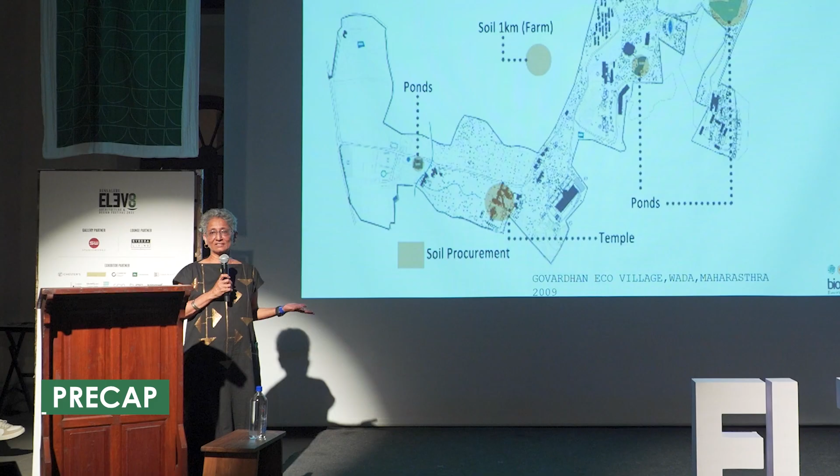When we started in 2009, we had no idea of the meteorological data of the site. So we worked for 8 months before we started, and we realized it's a composite climate. But besides that, again, it started, where am I going to get earth from for building? The interesting part was we didn't have, and you're all students, case studies to go back to. So if I go to Trivandrum and study that, I cannot use it here. And I didn't even have the money to travel so much. So I was only reading some books, looking at some pictures here and there, no internet at that time.

Let's say by serendipity, you ended up having gardens. Unlike now, when the cost of land is so high and cost of construction is sometimes 1/4, 1/5, that you build a lot more. We now are obsessed with cost. How do we work with cost? How do we reduce cost? Because for us, ecological construction has to be economical. In simple terms, if we make very expensive buildings for people who have taken loans, they have to pay it longer through EMI, and working is the worst, is a disaster for environment. So if people work less, they make nice art, or they have nice conversation, it's so much better than working. So it has become part of our ethos.

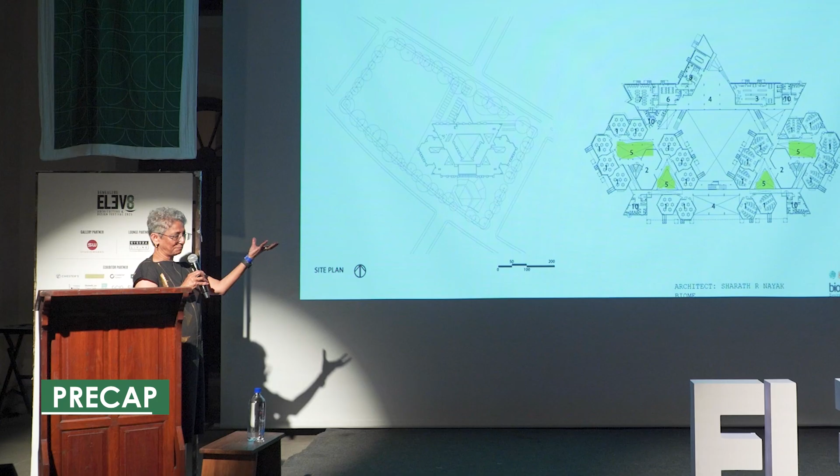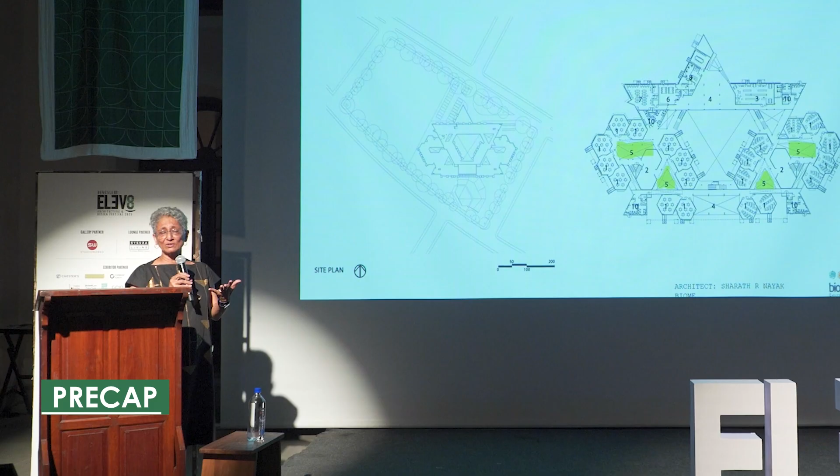So this is a school for Jindal Steel. It's about 1.5 lakh square feet. Every classroom has 3 sections. This was next to the plant, and the air was polluted because of the plant. So the school had to be naturally ventilated. So how do we do that? We can't open the windows because of the pollution. A combination of a lot of corruption in terms of making of blocks, a combination of bad design details, everything.

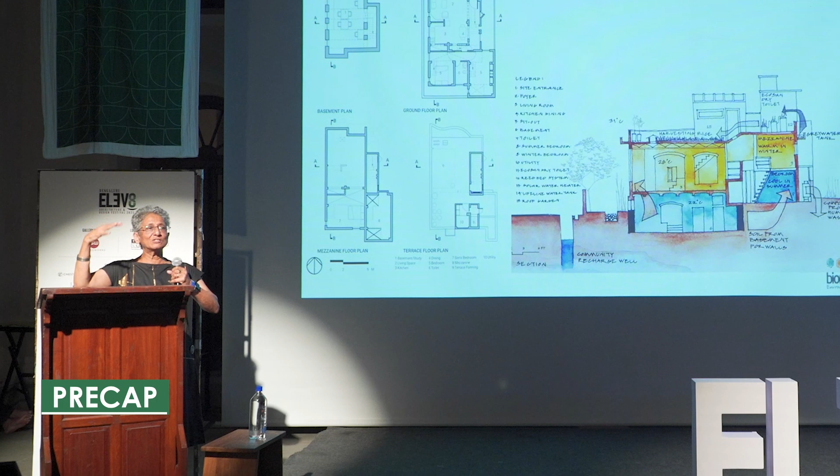The buildings were eroding away, and nobody was accepting use of earth. That failure pushed back using of earth in Bangalore by about 15 years.

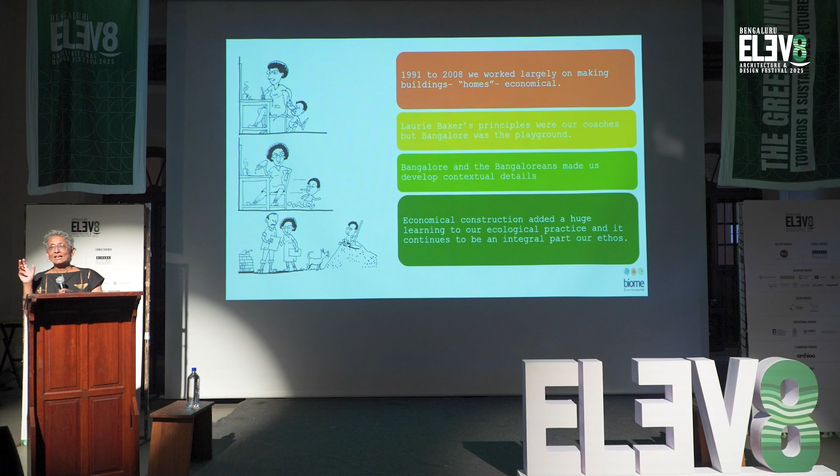So like I earlier said, the construction was double the cost of sites. So people had to reduce construction, and it had a beautiful result for it. What happened is that people built less. So by design, or let's say by serendipity, you ended up having gardens. Unlike now, when the cost of land is so high and cost of construction is sometimes 1/4, 1/5, that you build a lot more. You're taking the juice out of the site. But that wasn't happening then.

So Laurie Baker was known here. In Kerala, he'd been doing a lot of work, and in the South, he was known. It was acceptable to follow whatever his philosophies were with the clients, and a lot of the early clients were also from Kerala.

The interesting part was we didn't have, and you're all students, case studies to go back to. So if I go to Trivandrum and study that, I cannot use it here. And I didn't even have the money to travel so much. So I was only reading some books, looking at some pictures here and there, no internet at that time.

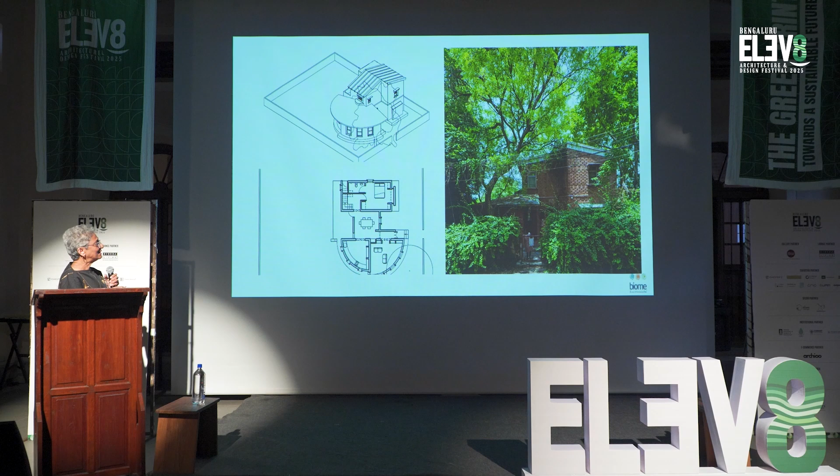With lots of skylights, saving cost in plaster and paint, that's the ethos, and using waste which is local. Instead of bringing Mangalore tiles from elsewhere, because we were not getting waste Mangalore tiles like Baker was getting in Kerala, we used stone which was available locally, just placed it.

What we are doing is not plastering, and also making the concrete better, because now we won't have exposed steel. So they also work as cover blocks.

In 1995, we bought our own plot of land in a place called Vidyaranyapura, and we decided to build our own home. Till then, talking about building with earth was difficult because Karnataka Housing Board had designed and built a large housing colony made with mud, sometime in the 80s, 86, 87. But a combination of a lot of corruption in the making of blocks, a combination of bad design details, everything, meant the buildings were eroding away and nobody was accepting use of earth. That failure pushed back the use of earth in Bangalore by about 15 years.

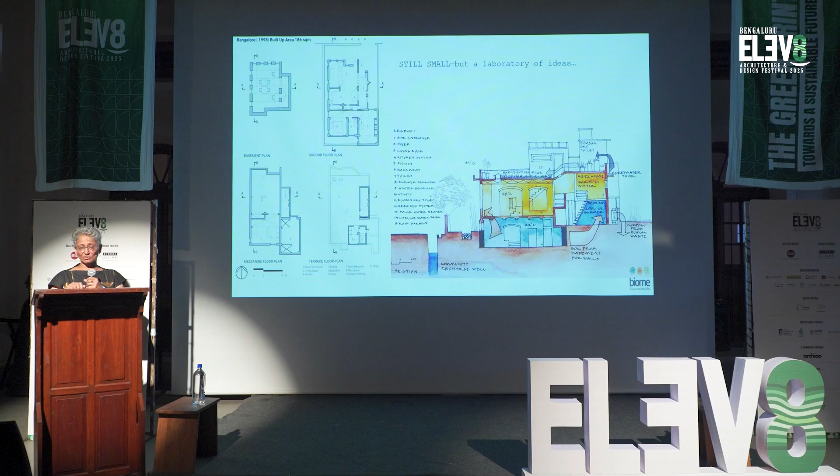That's the basement. It keeps changing. It's no longer a TT space, it's my home office, come a large bedroom thing.

The home is on a 30 by 50 plot, so it's a small plot, we can't play with the areas. So what we did was we played with the volume. The rooms are about 15 feet tall with a loft, so you have a bed at 7 feet, which is great during cold nights. You don't need anything to warm you up because it's right under the concrete. The heat comes down, and it's lovely to be there. So you're using volumes instead of areas in the design.

It became imperative for us to figure out where do we source earth from in all our designs. Two places where you source earth from are basements, so we talk to the client and say, have a basement. It's very difficult to talk about, but it's possible.

The next is water reservoirs, because we were working a lot on water too, since Bangalore needed that. We're working in peri-urban areas where there is no BWSSB connection for either taking away your waste or giving you water. So we worked on rainwater harvesting. Biome was involved in designing the bylaw for rainwater harvesting in Bangalore, and it all started from our home.

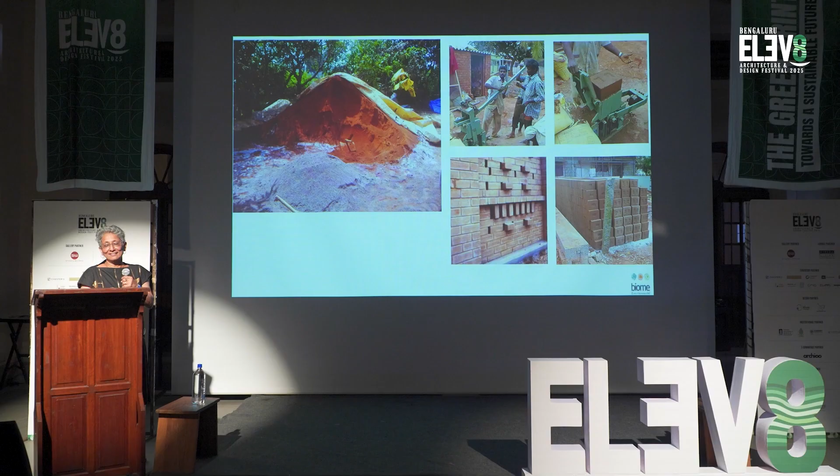So that's the section of the house. While it's doing this, in terms of living, we're also looking at how do we live there? Okay, we harvest the water, but what happens to our waste?

So we'd been to China to study rainwater harvesting. We came back with a toilet pan. People brought phones, they brought other electronic goods, but we brought a toilet pan. It was easy to get through customs too, because it's just a plastic pan everybody was seeing. But that is called a source separating pan.

Is it possible if I take this call? I'll just get my cook at home. I have my granddaughter at home, and I wanted to get back before I could, that I go home and cook. But if I could just take this call, I'll tell her to. Is that okay?

Basically, the toilet pan is called a source separating toilet, where you separate urine and fecal matter. You don't do it yourself, it comes out from your body that way. I know these are things, but these are important things.

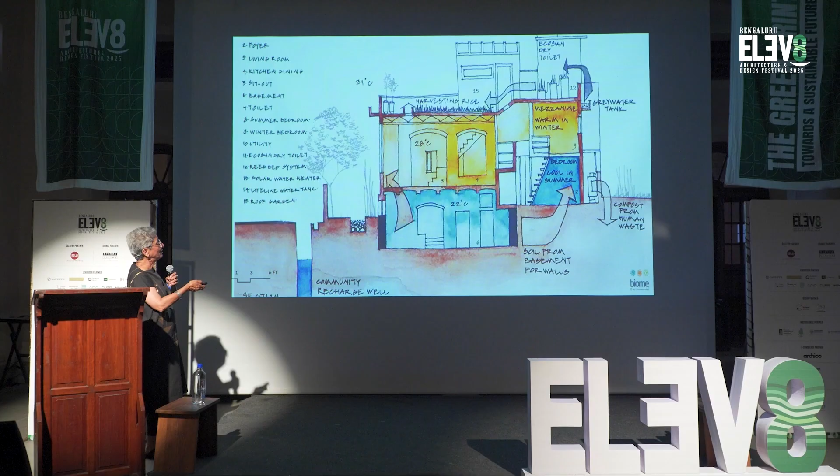So, using the urine, which we harvest in the EcoSan toilet, we grow rice on the terrace. Urine is very good. You all are walking, useless factories of fertilizer. You're not doing that enough.

But the idea of the basement kept growing. There's a basement with skylight. Our basement is the worst basement in terms of light because I didn't know how to work with basement, and I didn't even know how to work with light in Bangalore. I was born in Banaras, different kind of light, studied in Ahmedabad, different kind of light, but you come down south and the light is right on top.

And it's throughout the year the same, and worse in Bangalore, which is 80% cloud covered 60% of the year. It's like horrible gray sky. So how do you do it? You start working on a lot of skylights. So this is one basement with skylight, the other basement with a garden, so you don't feel you're in the basement, and you have a well in the basement.

So it takes care of water which falls into the basement, you don't have to worry, it goes into a well. Quite like here, we have 2 wells in this courtyard. They are covered with a very nice, square, minimalist finish. We would have celebrated the well because it's an important part of Bangalore, an important part of the ecosystem.

So here's a well here which collects all the rainwater which falls into the basement. Is this happening by itself? You're doing it? Okay, go back please. Okay, next, let me say next so I know what's happening.

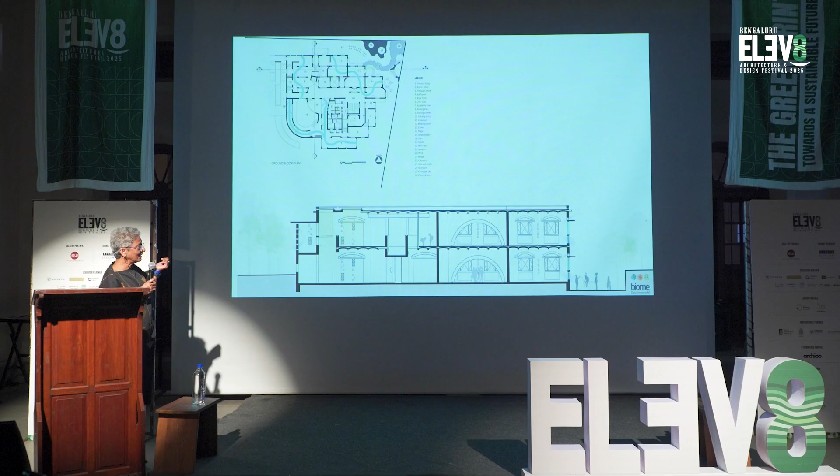That's what you see. This is the road, within a farm, so it's not blacktop. And that's the play area.

The Tamil Nadu school board doesn't allow classrooms in the basement, rightly so. So what do we do? We have to get the earth to build. This is about 15 years old now, and nobody was making blocks there. We had to make blocks because that's also what we are known for, and people want that anywhere in the world now.

So he said, we'll cut everything, even your playground. By the way, we don't use the top 1 foot, 300 mm of soil, because that's the soil which has humus and is really good for growing stuff. But below that, we use it. So we cut everything out and made the building.

Now children can come out of the classroom into the garden, into an open space. That's how the inside has large passageways with play, because it's so hot in Coimbatore, so why can't we play inside itself? Different ways of negotiating levels—children go up by the slide.

A classroom modulated the windows in such a way that, because they sit on the floor, air moves over your body, and light comes in deeper—again, with steel windows, minimum simple steel windows.

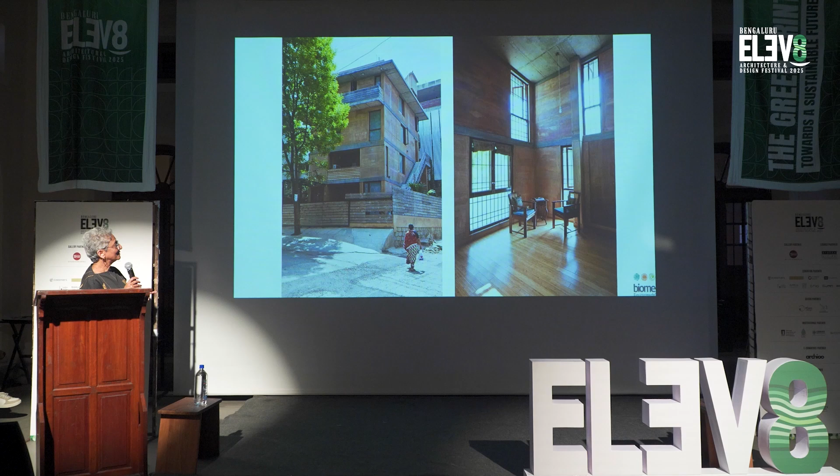So that's the final, in terms of our roof. We call it a smart roof. Our home is called Sans Souci.

We harvest clean drinking water, which is what we drink throughout the year. So our drinking water is secured from our roof - we don't have to worry if water came or not, at least drinking water is secured. Then we treat the wastewater on the terrace, because that's where we get the best sun. We use plants to treat the wastewater and use it for flushing as well as for the rice growing on the terrace. Then we harvest energy.

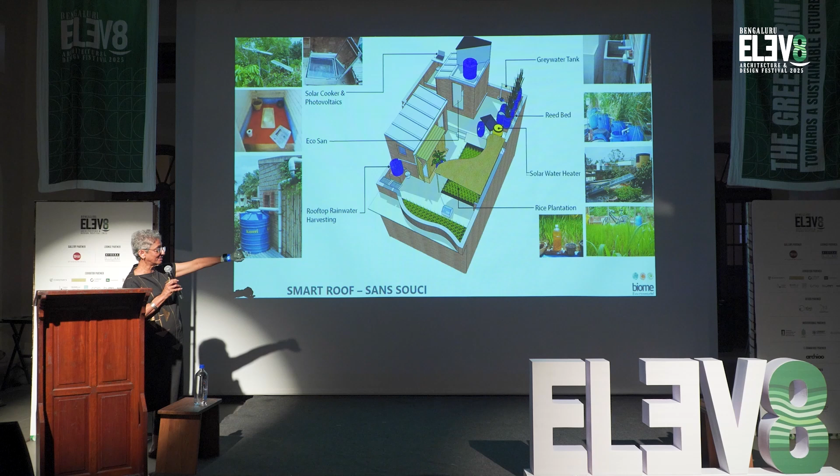That's the dry toilet, we use it for fertilizer. The grey water, from bath and washing machine, is treated again on the terrace, and that's the rice growing on the terrace. And that bottle is urine.

That's the rice growing on the terrace, that's the rice getting harvested. The first year we got rice, the next year onwards rice and ragi, but the rest of the ecosystem knew about it, so the birds and the rodents would finish it off. But we're not doing it for ourselves - we're doing it for the ecosystem and also for the idea that rice can be grown on the terrace.

The idea that cities can be providers of food too, and you can take care of your waste within your plot or within your city. And this thought, these discussions, have expanded to the city scale.

Vishwanath has been working with BWSSB hugely on water and wastewater. Right now, this city of Bangalore treats its wastewater and is sending it 100 kilometers away to Kolar, a dry region of Karnataka, and it's filling up lakes there. The wells are revived, so people have drinking water security, plus enough water for growing rice.

So they're growing rice 3 times a year, and they don't have to fight with Tamil Nadu or any other state - it's just coming, and it is our city which is giving. So look at it like things can scale up from a small idea. The small idea has to be really impactful, and you have to work at it further.

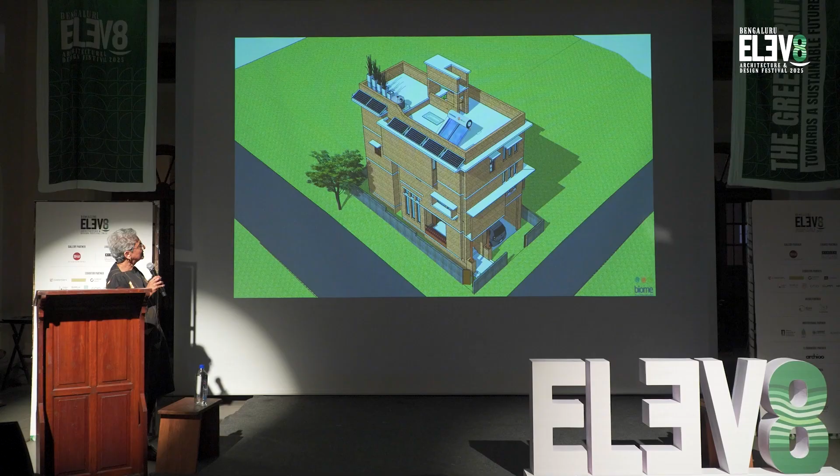And then you also have fun in design, with simple additions.

So while earth was worked a lot upon, the other thing one kept seeing is that our cities are changing - our cities are breaking all the while. We are in this process because we are that kind of an economy still growing, and the pressure on land is so much that we will be breaking small homes. So can buildings be a waste sink? Can we use construction debris and see the buildings itself as future quarries?

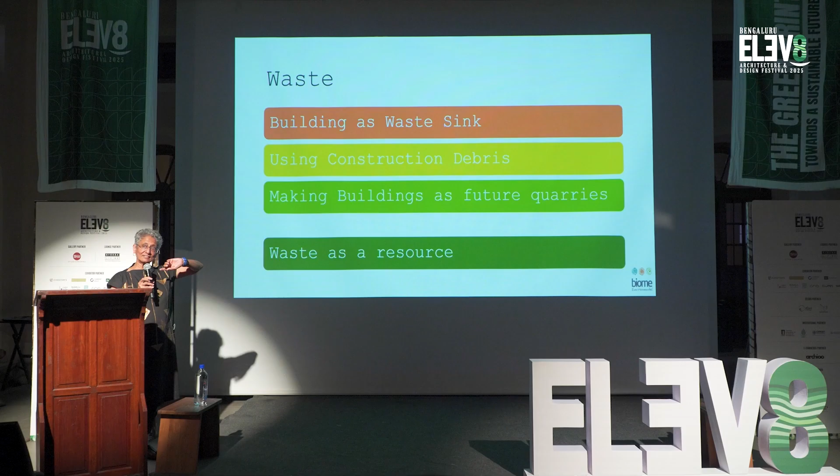So we filled a slab with this waste - this was a time before many NGOs came who are processing computer peripherals, so this was before that. A filler slab is basically replacing concrete below the neutral axis, so that concrete is not needed because it's in the tension zone - so anything which is lighter works. Computer keyboards are certainly lighter than that much concrete, so we use that, because otherwise where do you throw it?

Or this, I've shown earlier, using waste stone.

It's a project in Bhopal where, through design iterations, the corner where Eklavya - the NGO which also makes development aids and books - had to store paper, became the southwest corner. That's the hottest corner, and we were very worried about anything happening to the paper there, so we had to shade that corner.

When we started the project, we'd been to the Kabadiwalas and saw lovely louvers, again the Indian Railways louvers of aluminium, and said when we reach this stage, we will use them as the shading. 7 years - it takes a long time to do architecture projects.

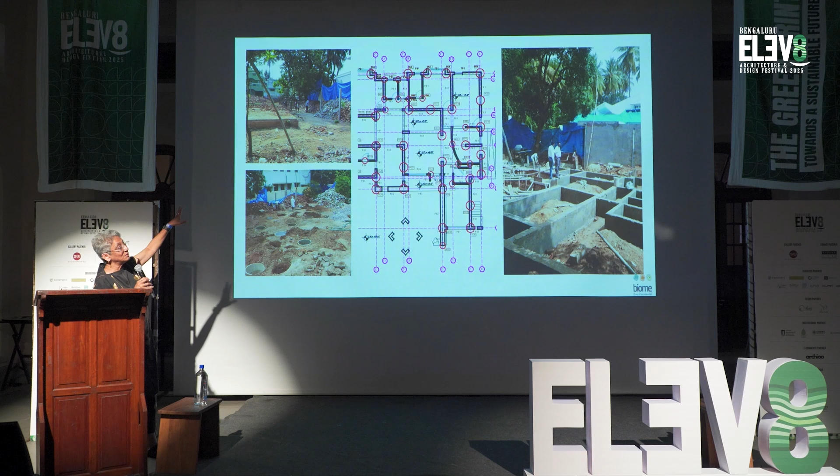When we started digging for the foundation, since we were going to make a load-bearing structure and didn't want columns and beams, we noticed the ground had a lot of water and silty soil. Through our interaction with structural engineer Professor Yoganand, we decided to do a well foundation—so the circles are all wells. You dig, well rings are inserted, and it's filled with rubble stored from breaking the building, then a grade beam is put in place. So everything from below the foundation was also reused, plus the only extra material was the steel for the grade beam.

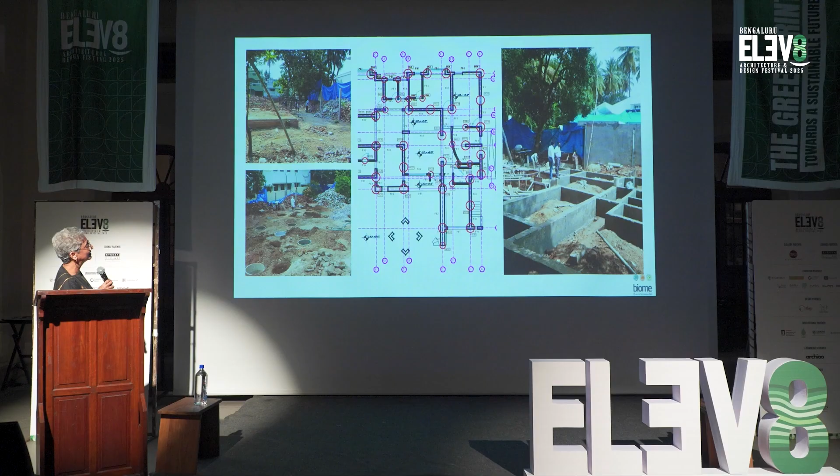And that's the house. The stone walls are foundation stone, and the rest of it is earth blocks.

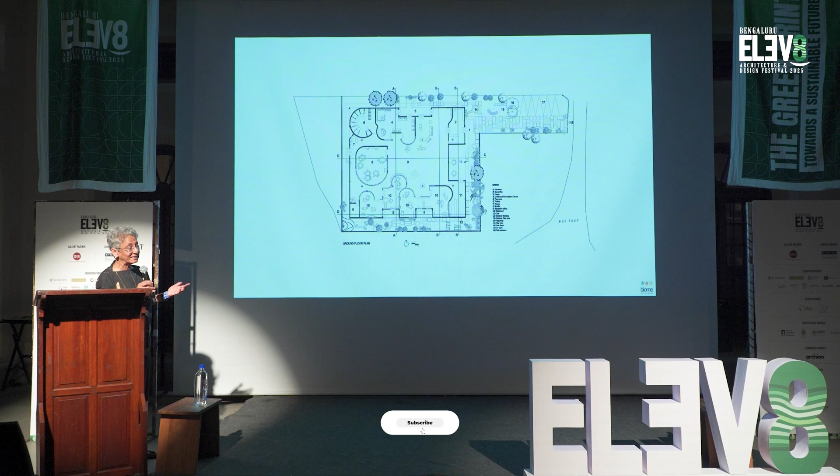This project is a school called Atelier on Hosur Sarjapur Road, where the land was meant for only 5 years—the client wanted a small school. We decided to try a structure which could be reused later, so it becomes a quarry of the future, since it's only for 5 years. It's been 10 years and it's still there. So we decided how to do the structure.

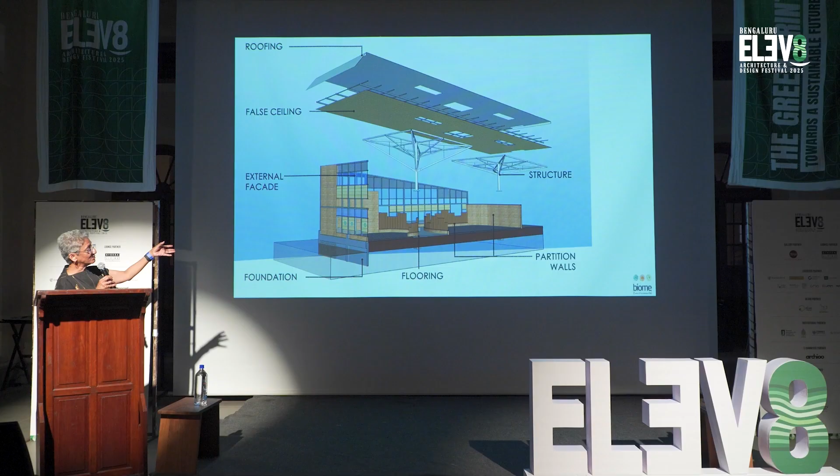We're known for earth blocks, so we used some earth blocks made elsewhere where we had a lot of soil. Most of the external facade is glass, aluminum, and wood. The structure is steel, with a bamboo false ceiling and GI sheets. Even in the foundation there's stone chapri, so all of it can be removed. That's how it looks.

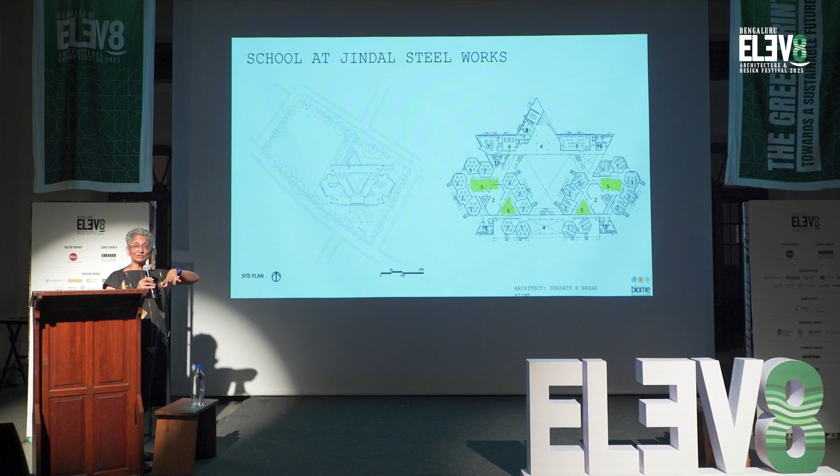A couple of projects next, from larger projects, and not earth. This is a school for Jindal Steel, about 1.5 lakh square feet. Every classroom has 3 sections. This was next to the plant, and the air was polluted because of it, so the school had to be naturally ventilated. We couldn't open the windows because of the pollution, so how do we do that?

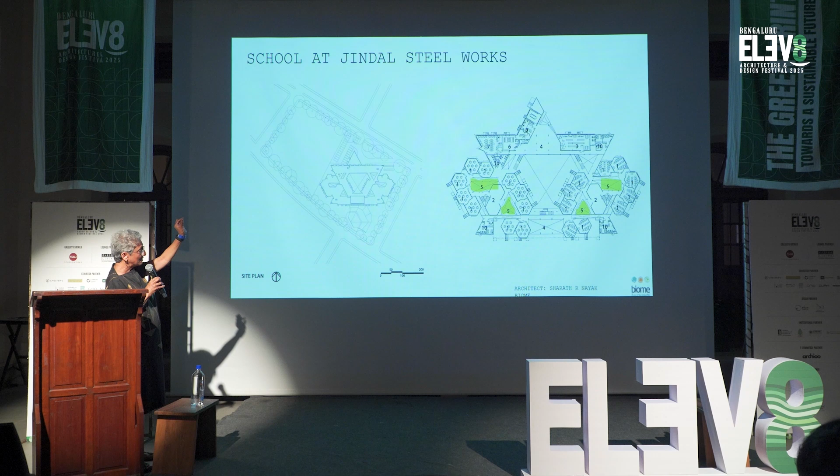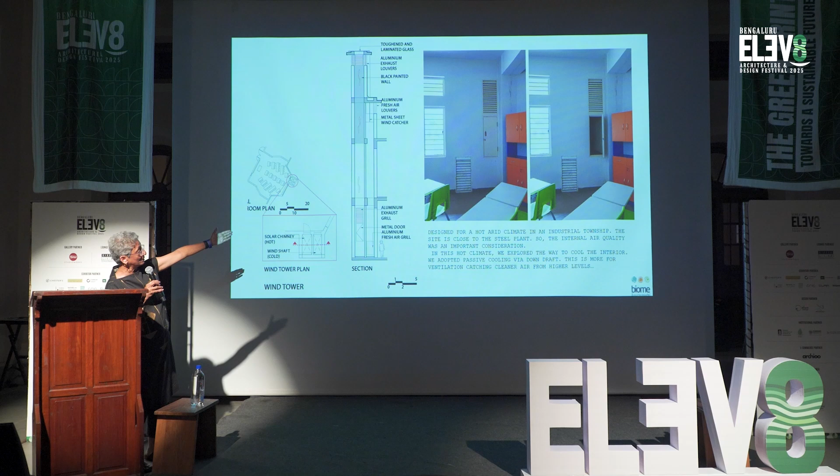The decision was to put wind shafts in. The upper classrooms shade the lower ones, and there are several smaller courtyards that are always shaded. This was the system put into the room: we take fresh, cooler air from the top since it comes down, and it is exhausted outside into the classroom, which is cooler at the lower level, with the hotter air taken from above. So it's a solar chimney—we've had to paint it.

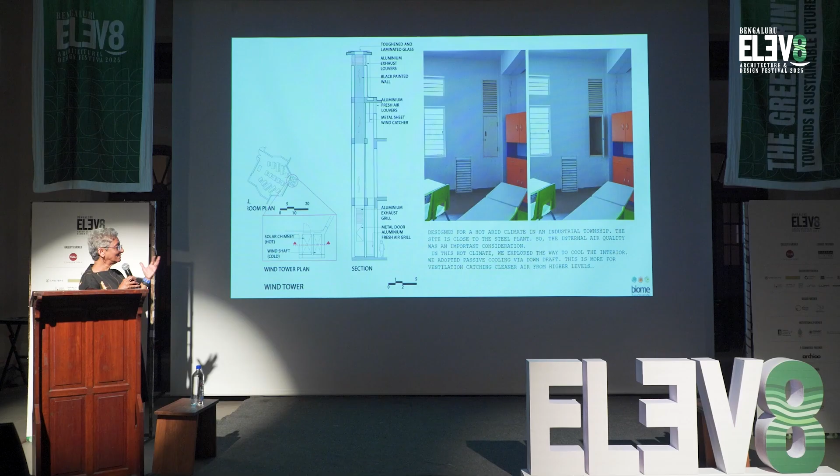We had to paint them black and gray, but this is the problem with architecture - you do the hard work as an architect and the client takes over. So I made this picture black and white, otherwise this is pink and green, which doesn't tell you which chimney is exhausting and which is taking the cooler air down. They were to be separately, at least dark gray and white.

Near Hyderabad, near Vikarabad in fact, we went to this site when it had already rained - sites always look beautiful during the rainy season. It was a hill, and the clients had done a structure in steel and aerocon panels, something like that, which we felt is not part of the hill. It's just sitting on top of it.

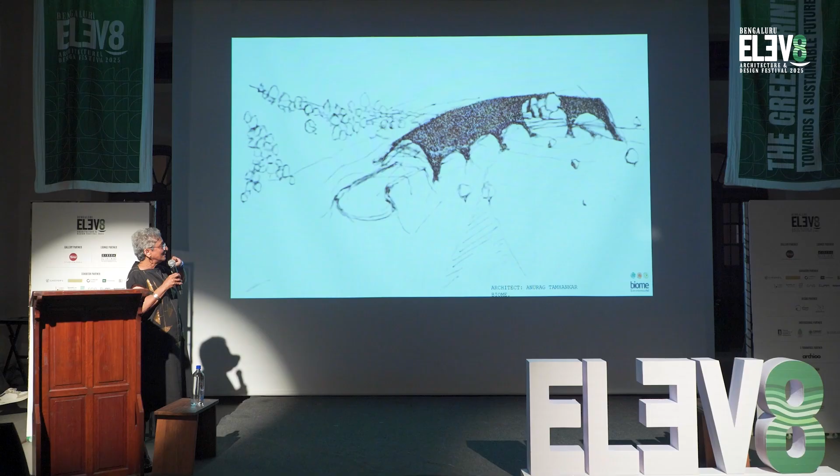So we just sketched at the site - can we make a smaller hill alone? These are also of my colleagues, so this is Anurag, the earlier school was by Sharat Nayak. We made different models and we worked with a structural engineer, Mr. Rao, in Hyderabad.

When he gave the drawings, we had to make small models to understand the way all those forces are working, and this model had to be also translated and understood by the contractor at the site, to understand what the proportions would be. Mr. Rao had also designed the Husain-Doshi Gufa in Ahmedabad, near CEPT.

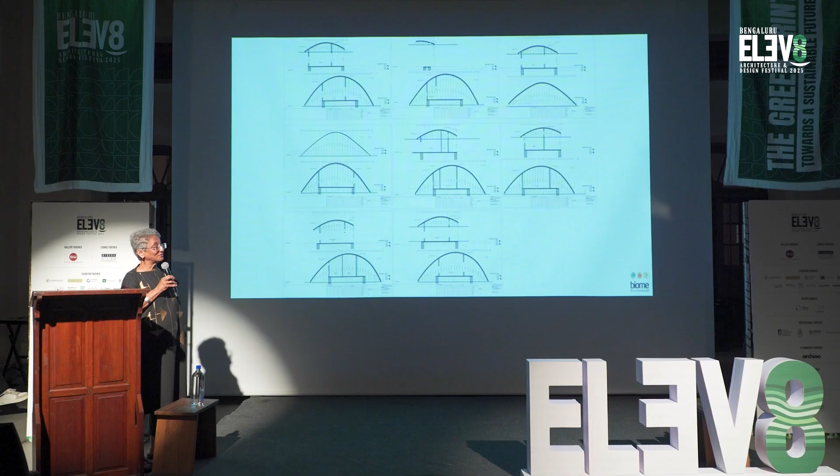At each section, different parabolas were drafted and given. These were done at the sites - at the site, the parabola was drawn, the steel was bent and then placed. Then the shotcrete happened.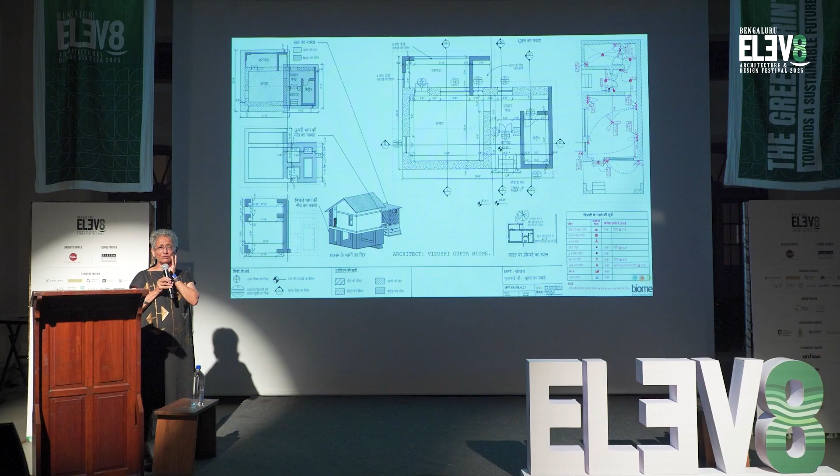We worked in about 40 villages in Madhya Pradesh. The Madhya Pradesh Tourism Board had an idea to have homestays in villages for urban people. So in a homestead, you have to add a room and a toilet, and we did about 200 of them, just room and toilet. But you have to work with the local people - a local NGO identifies the various people who would have these rooms, and it's lovely to eat their cooking. So the city dweller stays there and eats the cooking, but wants a good toilet and a larger room compared to what the homestead has. The difficulty was not that this cannot happen, but how do you convey it?

So Vidushi Gupta worked on it and she wrote everything in the local language. She learned the various terms - every 20 kilometers away, there will be a different term for a tile or a brick or wood or something. She would draft it in Hindi, send it in Devanagari, and send it to the place. Then she would have WhatsApp calls, and she also used AI to make some stuff and send images, and they would understand and make it out of it. I wish I had taken one where she designed a cot.

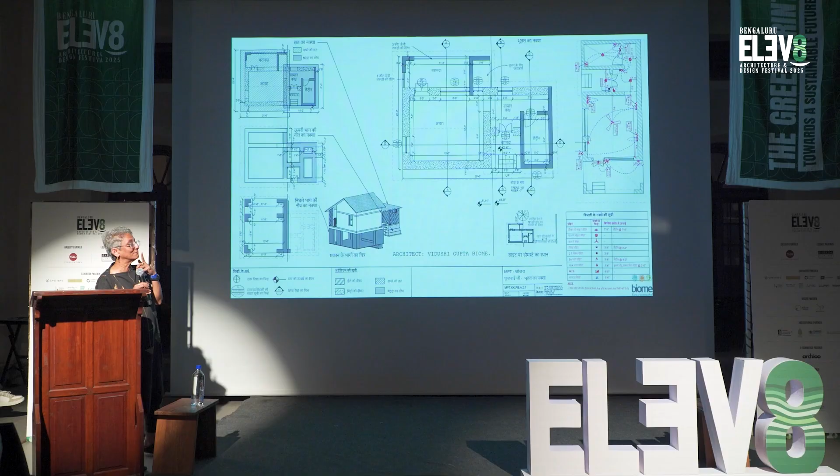These are the kind of structures which would happen. The interior design is their own - that's the addition, the room in that homestead. So they made a small lawn.

But this was very interesting - this unit, Rajkumari's husband decided he will build it. But like most husbands, nothing happened after 6 to 7 months. So Rajkumari decided it's enough, let me just talk to my friends. About 6 or 7 other women also came together and they built it. They always asked the plumber or electrician, the male members, to come do some things, but otherwise everything is done by Rajkumari and her friends. But this Rajkumari is not only building the home, she's also working in the field, looking after the children, cooking - just like all women, you have to do the multitasking. And she did it.